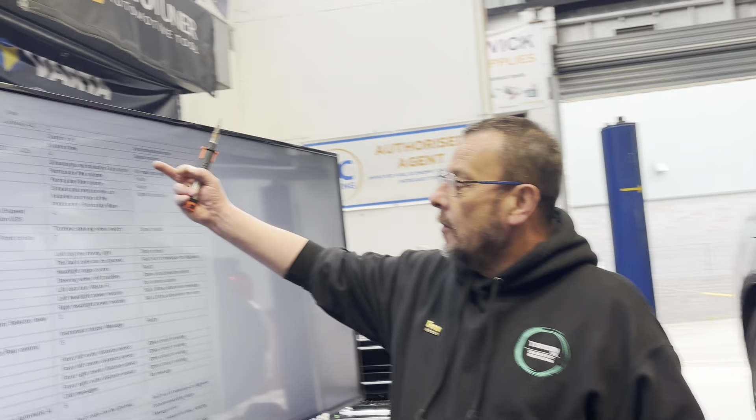We've got all sorts of codes in here, EGR, DPF system. Bear with me one second.

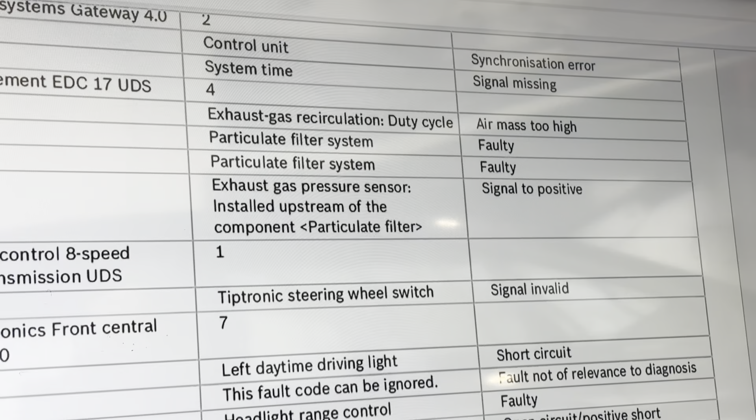Two minutes later, joys of working in a live workshop. So we've got EGR, DPF problems, exhaust gas pressure sensor problems with the engine. It's not in for any of that, but we will have a look at that within, just some basic live data within the assessment.

Again, the assessment is the corners and edges of a jigsaw puzzle. We've got loads of problems for the lights, daytime running lights, headlight range control, steering wheel paddles, communication faults, all sorts of stuff.

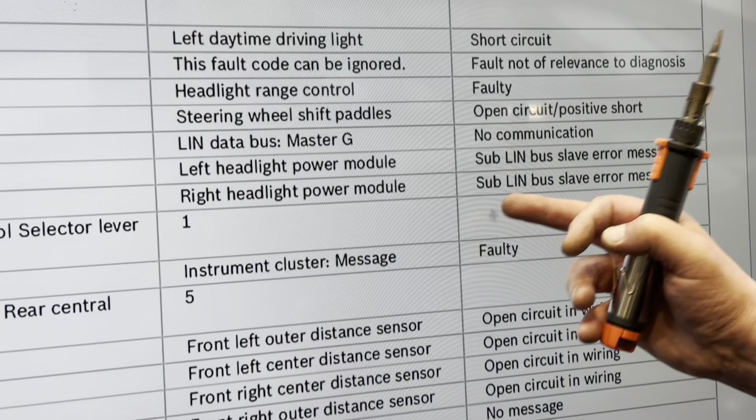We've got circuit faults for the parking sensors. We've got stuff really that we don't really need to be looking at in here.

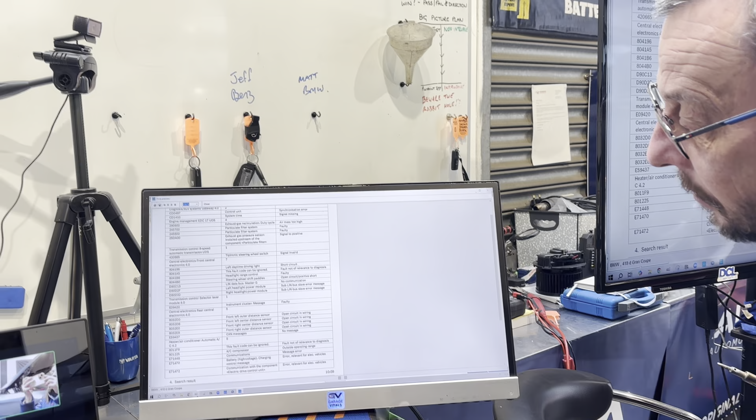So what we've done, we've pulled the information up on ALLDATA using the OEM information, and had a look at some wiring diagrams. If we just click over it... oh, lefty, come on. No, I need my right hand for it.

So we've had a look at the wiring diagram on ALLDATA for the front parking sensors. So we're looking at these connectors here, what's common and all that. We've also checked, how do we get the bumper off?

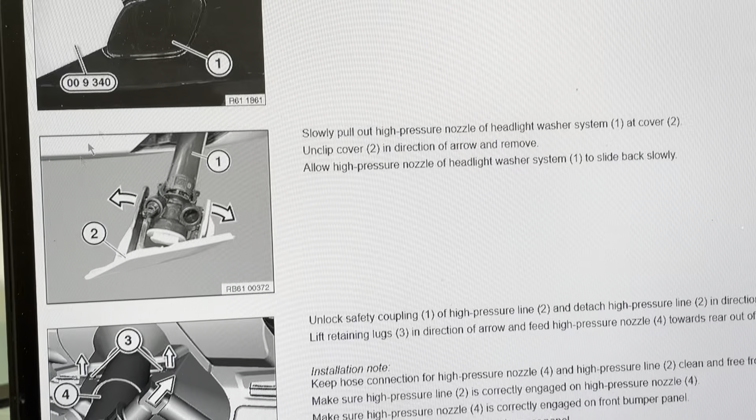The great thing about the OEM information is it tells us step by step how to get the bumper off, how to get the headlamp washers off without breaking the nozzles, and how to get the bumper down.

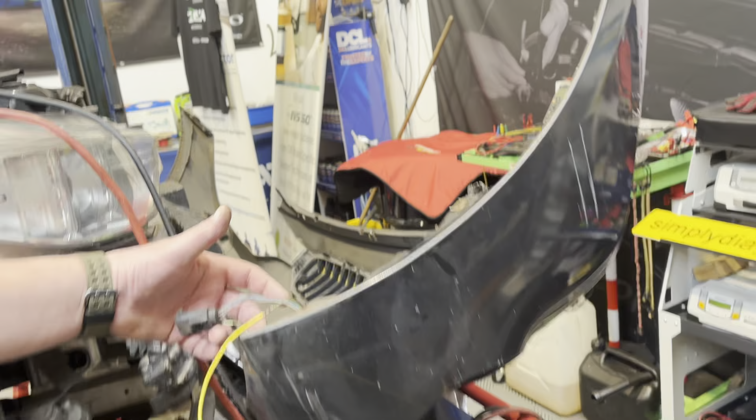So you can see here now, we've got the bumper off, suitably supported, and the first thing we've found is broken and corroded wiring going to the parking distance sensors. So that's the first step.

Let's repair that, and then what we'll do is go back and have a look, see if we've now got communication with the parking sensors, see if we've got communication with the headlamps, and we'll go from there. Bit of the process, bit of the jigsaw.